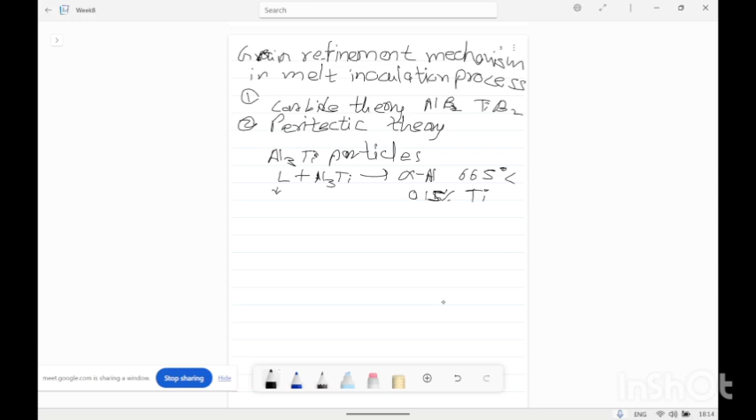Early nucleation of aluminum allows heterogeneous nucleation, leading to the grain refinement of the microstructure. So the next theory, third, is the peritectic hulk theory.

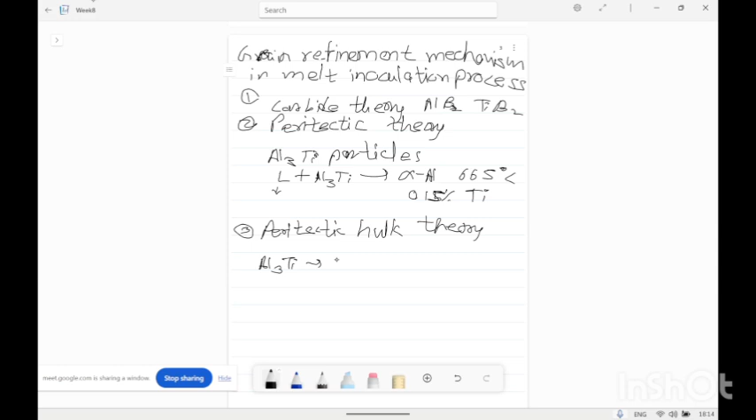In peritectic hulk theory, we know that Al3Ti provides the heterogeneous surface. But the intermetallic particles can also be dissolved with time, as the temperature of the liquid is still high. With prolonged exposure, the intermetallic particles can dissolve in the matrix. So the dissolution of these particles has to be prevented to maintain grain refinement.

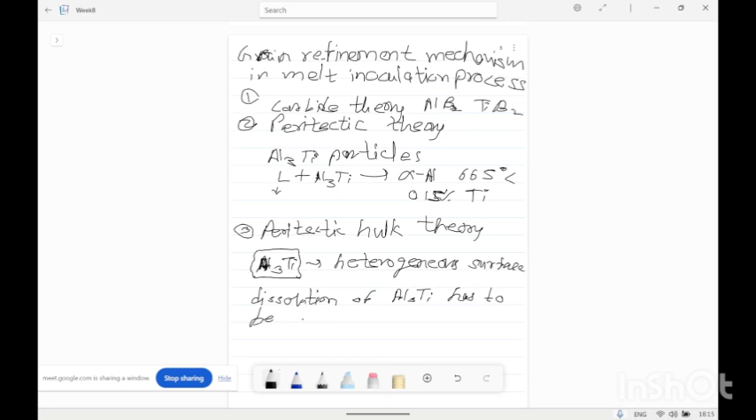So how can it be prevented? TiB2 particles, which form with the aluminium-titanium-boron master alloy addition, surround the Al3Ti particles and form a shell around them to avoid dissolution. As the melting point of TiB2 is very high, these titanium boride particles prevent the dissolution of the Al3Ti particles.

As the Al3Ti particles dissolve as the process proceeds, they leave behind a liquid of peritectic composition inside the boride shell with time.

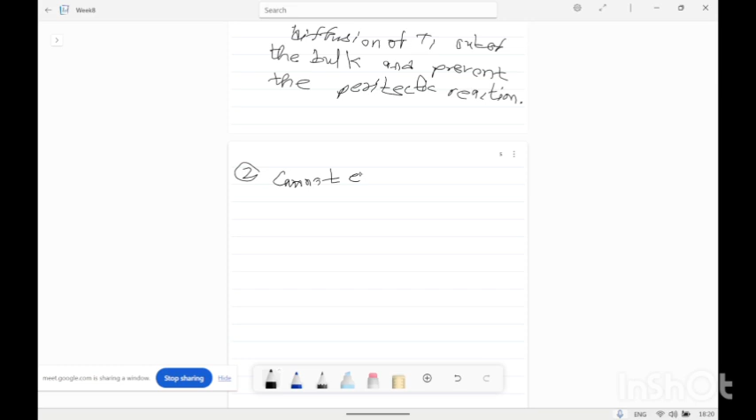The second limitation is that it cannot explain the recovery by the stirring process. Because in stirring, the settled Al3Ti particles will again disperse in the bulk, be suspended uniformly, and provide heterogeneous nucleation sites.

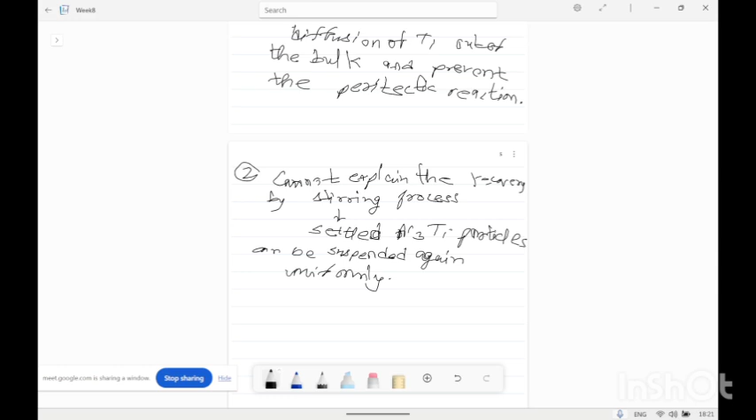The next theory is the hypernucleation theory. In hypernucleation theory, titanium segregates at the boride-melt interface and restricts the mobility of aluminum atoms in the liquid, which leads to the formation of pseudocrystals.

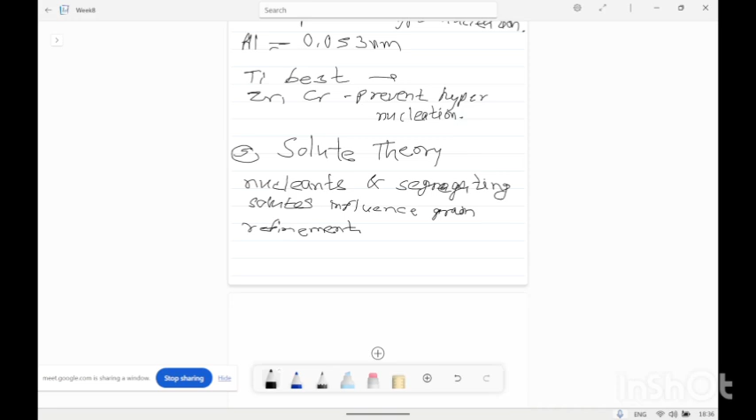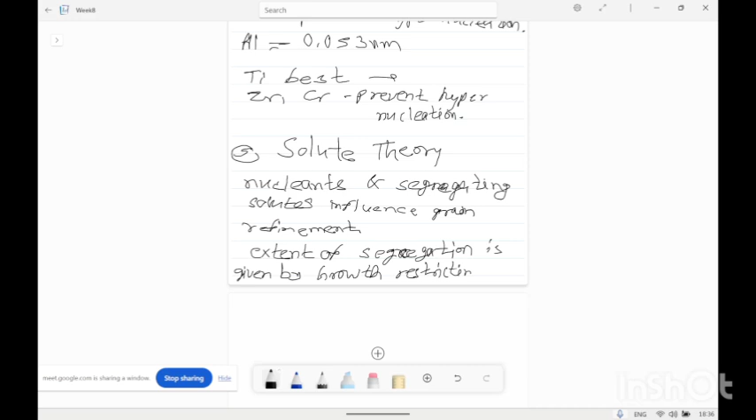So the extent of segregation of nucleants and solute atoms is given as the growth restricting factor. So the GRF, that is growth restricting factor, is given by a formula. If we write the number of grains per unit volume, meaning nucleating grains, by NVG, and number of particles per unit volume, NBP.

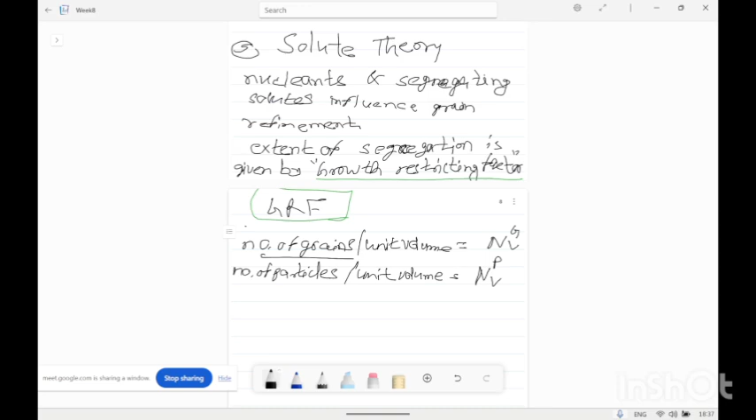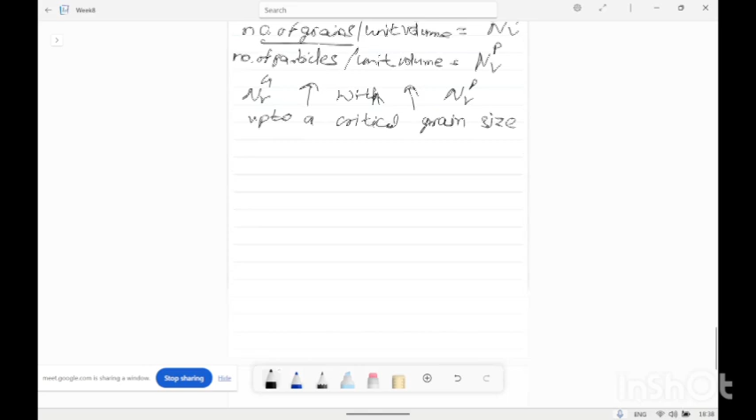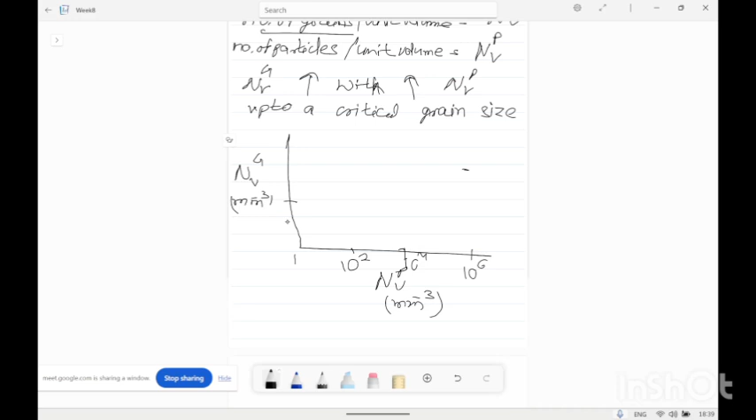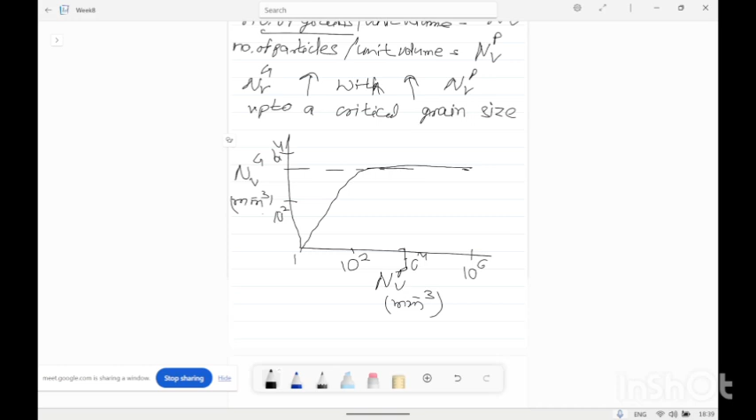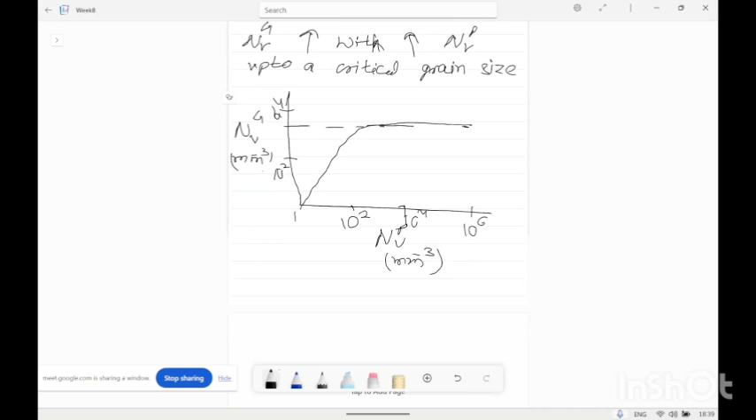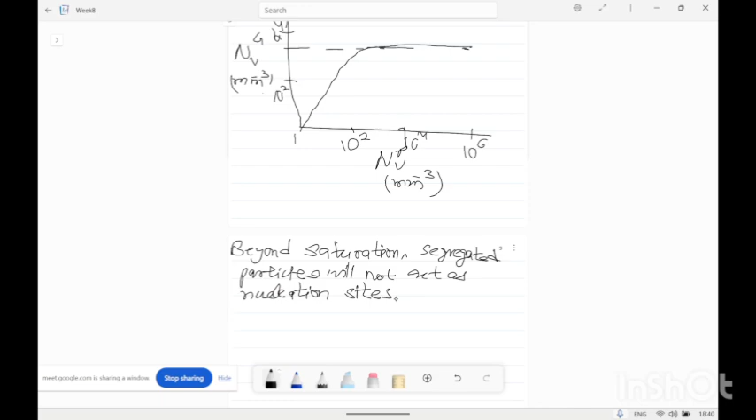So after saturation, the segregating particles do not act as nucleation sites. Means beyond saturation, segregated particles will not act as nucleation sites. And for finer grain size, the growth restricting factor should be high. Means growth restriction should be there.

So if we see the relation between growth rate and growth restricting factor, they relate inversely. Means for high growth restricting factor, the growth rate will be low, and the GRF is given as mC0(k minus 1). So here m is the slope of the liquidus line, C0 is the solute concentration in melt, and k is the equilibrium partitioning constant.

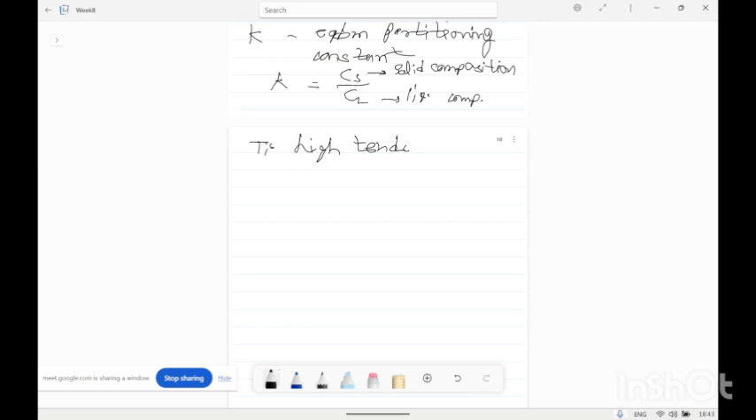That is given as k equals Cs by Cl, where Cs is the concentration of solid, so this is solid composition, and this is liquid composition. So the segregated titanium has a high segregation tendency. Means high growth restricting factor. That's why the grain refinement is higher with titanium addition.

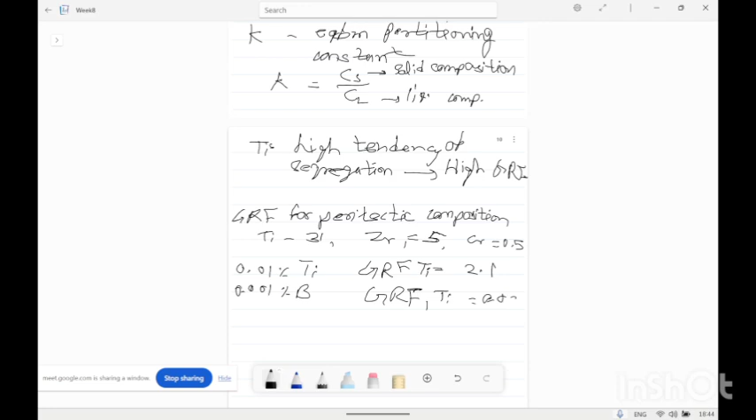So the GRF values for the peritectic composition will be: for titanium it is 31, for zirconium it is 5, and for chromium it is 0.5. So here we can see that zirconium and chromium have less growth restricting factor. Similarly for 0.01% titanium addition, the GRF for titanium will be 2.1, and for 0.001% boron, the GRF of titanium will be 0.02. Means boron can restrict the segregation of titanium atoms.

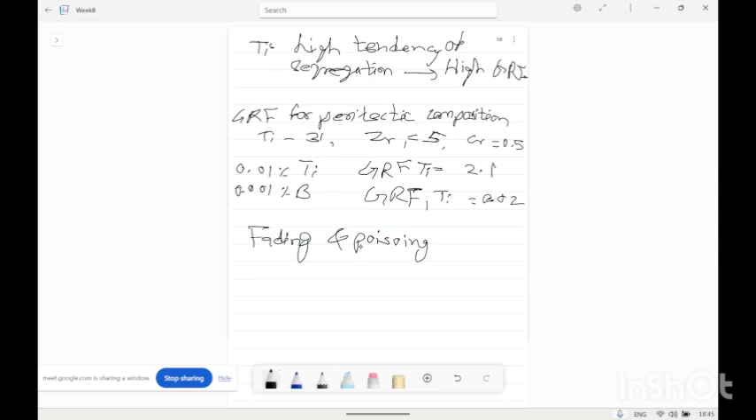Next theory in grain refinement is fading and poisoning. Fading means the decrease in nucleation rate, and the grain refinement efficiency decreases with time and is lost after some time. And poisoning means the stopping of the grain refinement efficiency.

So the solubility of titanium in liquid aluminium is very less; the titanium solubility in aluminium is 0.25% maximum. If the concentration of titanium is very less, 0.01% titanium, the Al3Ti particles are not stable and dissolve with time, leading to fading of the grain refinement efficiency. The dissolution of these particles depends on the holding time. Then the grain refinement efficiency will be lost if the Al3Ti particles dissolve.

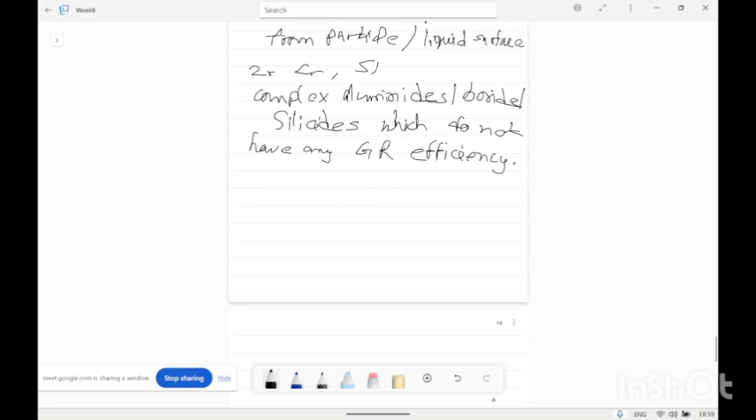So these are the limitations of element addition in the grain refinement process. Next is how grain refinement is achieved in melt inoculation by other means.

Grain refinement by mechanical or electromagnetic means can also be done by stirring or vibration. It can be done by mechanical stirring, electromagnetic stirring, and third is bubble mixing.

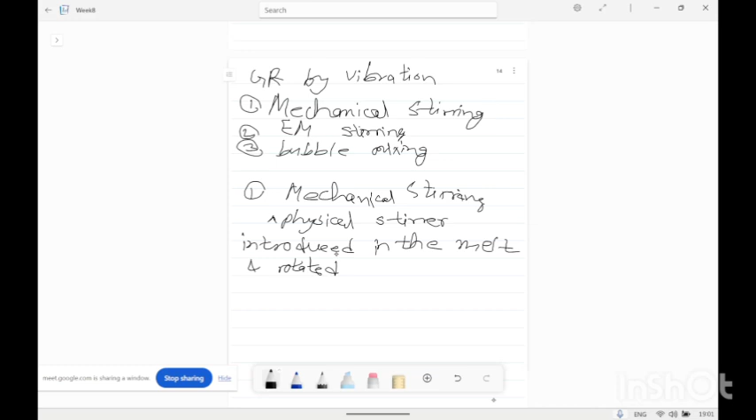So in the mechanical stirring process, a physical stirrer is introduced in the melt and rotated by a motor. The mechanical stirring generates a shear fracture mechanism. In the shear fracture mechanism, the shear force generated by the mechanical stirring breaks the dendrite arms.

Shear force is caused by stirring of the viscous liquid, meaning the melt. So the shear force generated in this process leads to fragmentation and breaking of the dendrite arms. Dendritic arms means, as we see in the solidification process, at the mold surface small grains generate and grow as dendrites into the melt.

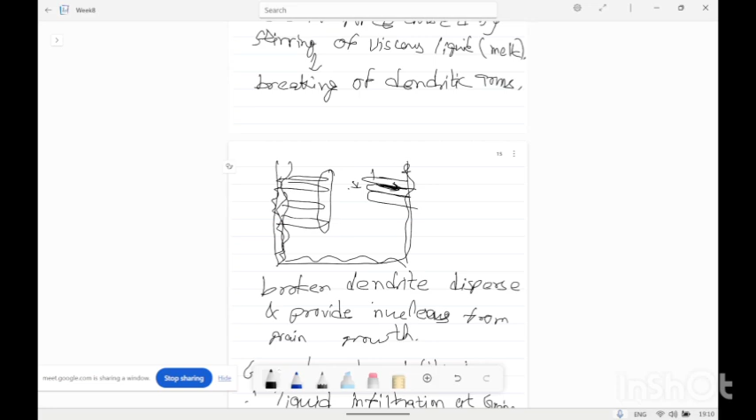So this formation leads to the breaking of dendrite arms. This increase in grain boundary energy above the solid liquid interface leads to detachment of dendrite arms from their mother grain. In this picture we can see two solid grains. The solid liquid interface is this, and this is solid. So if this energy exceeds twice the solid liquid interfacial energy, the dendrite arms will detach from the mother grain.

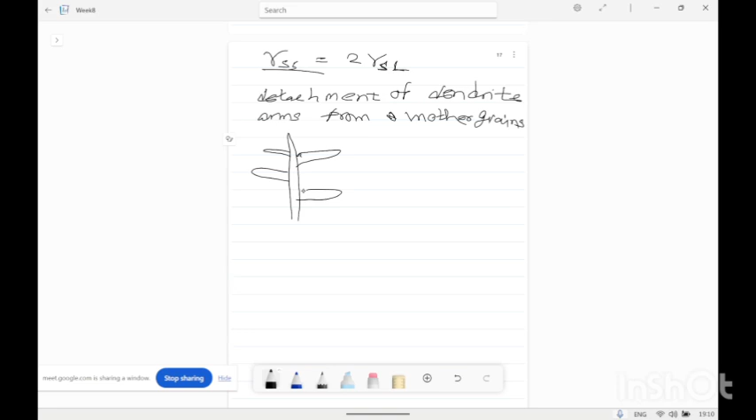The next mechanism is the remelting of the dendrite root. The dendrite forms with multiple arms. First this is the primary arm, next are the secondary arms nucleating from the primary dendrite, secondary dendritic arms.

So at the root of these secondary dendrite arms, due to the induced ripening and stirring effect, the solute segregates near the dendrite root. Due to the stirring process, solute segregates at the dendrite root.

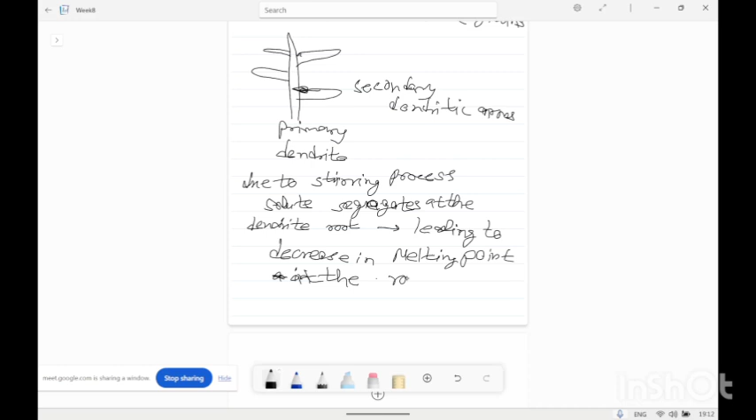So the segregation of solute near the dendrite root leads to a decrease in melting point in that region, at the root. And the curvature existing at the dendrite root also decreases the melting point of that region.

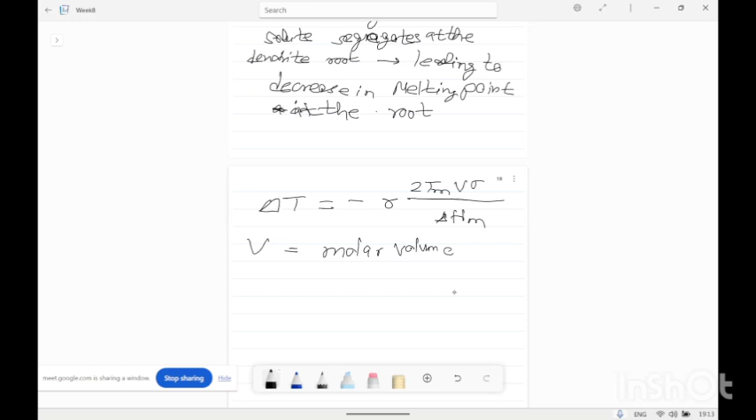So the decrease in temperature near the dendritic root is given as 2 Tm V sigma divided by R delta Hm. Here V is the molar volume, sigma is the solid-solid interfacial energy, delta Hm is the molar heat of fusion, enthalpy of fusion, and R is the radius of curvature at the dendritic root.

So the fluctuation produced by the stirring process leads to temperature and composition changes near the dendritic root, which leads to remelting of that dendrite arm. In this position, due to stirring, the composition and melting point in this localized region change, leading to the melting of this arm. So the broken secondary arm will be free, and in the stirring process will act as a site for heterogeneous nucleation because of the remelting of the secondary dendrite arm at the root.

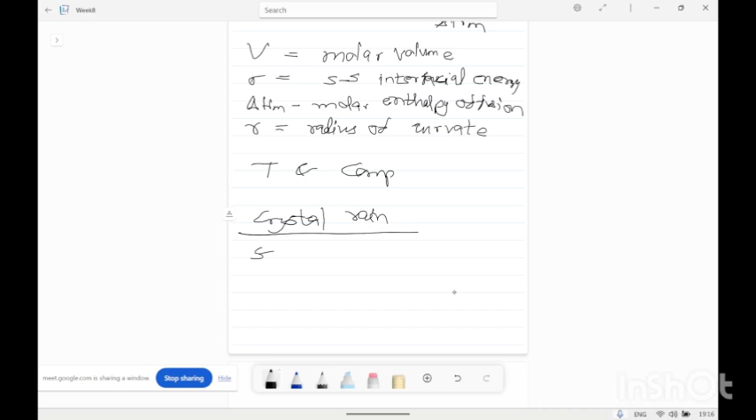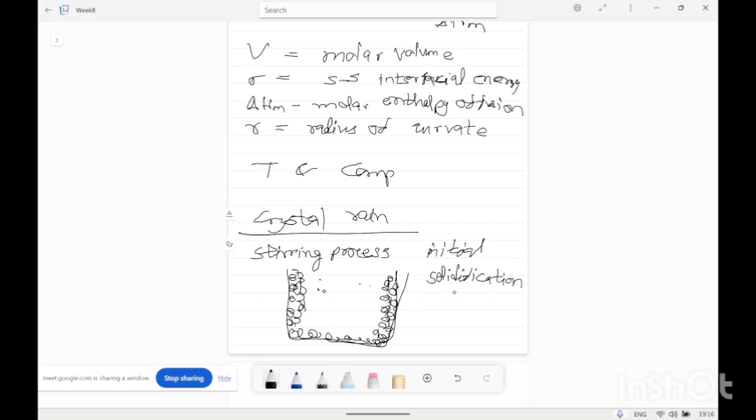So the next process is the crystal rain. In the initial process of solidification, small nuclei form near the mold walls, and near the walls the solid phase concentration is higher than the liquid phase. So due to the stirring process, the solid phase detaches from the mold walls and starts to fall in the liquid.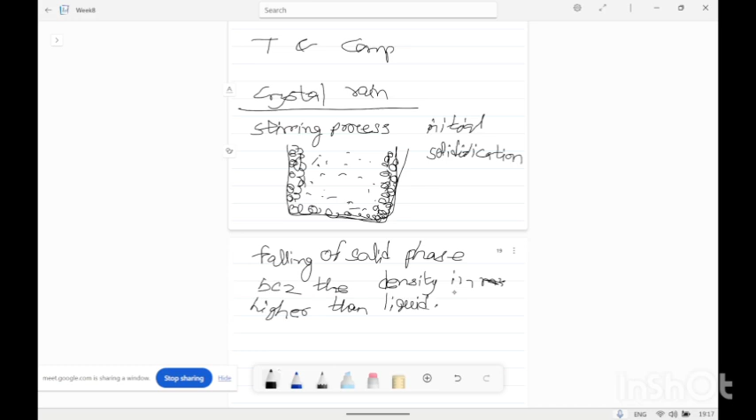The falling of the solid phase is also due to density difference, because the density of the solid phase is higher than the liquid, so it starts to fall in the liquid. The number of solid phases is so high that it looks like a crystal rain in the liquid melt. So the crystal rain leads to a very high increase in grain refinement efficiency.

So the falling solid phases or nuclei of grains can remelt because of the heat flux of the liquid, or can grow.

Next mechanism is ultrasonic cavitation. In the solidification process, some bubbles are present in the liquid melt because of gases entrapped in the melt. The clustering, growth and sudden collapse of these big bubbles generates cavitation in the liquid and provides a much higher pressure on the melt layers for a short time.

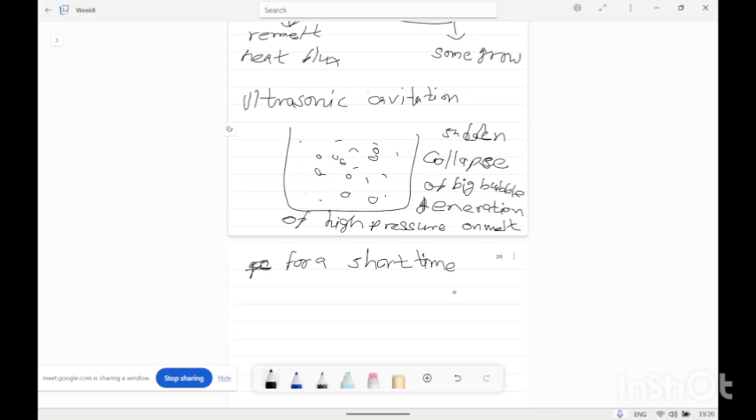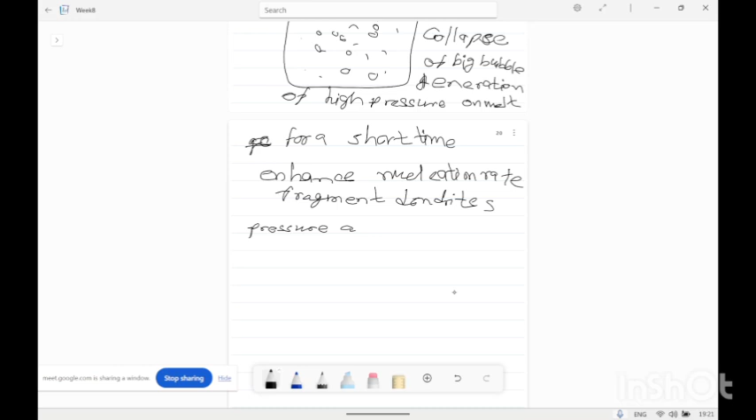So the generated pressure enhances the nucleation rate, and it also fragments the dendrites. The high pressure decreases the activation energy for nucleation, and because the activation energy decreases, it leads to more nucleation of particles.

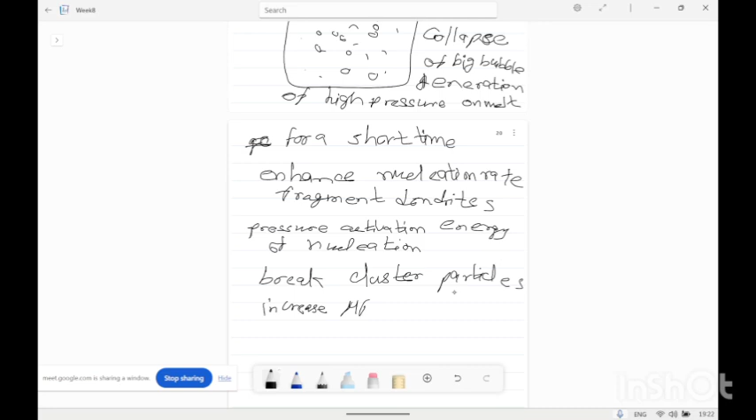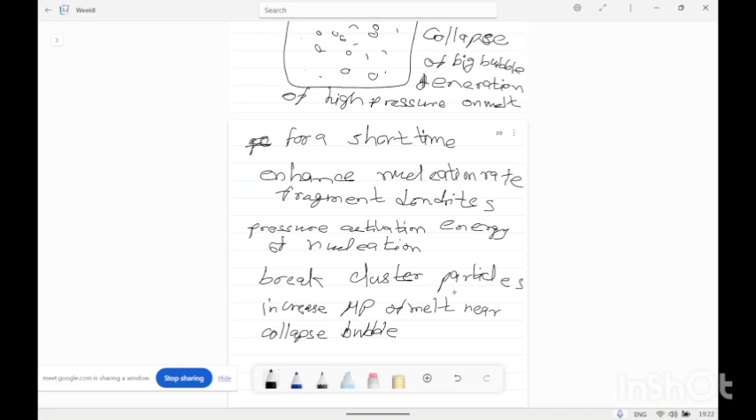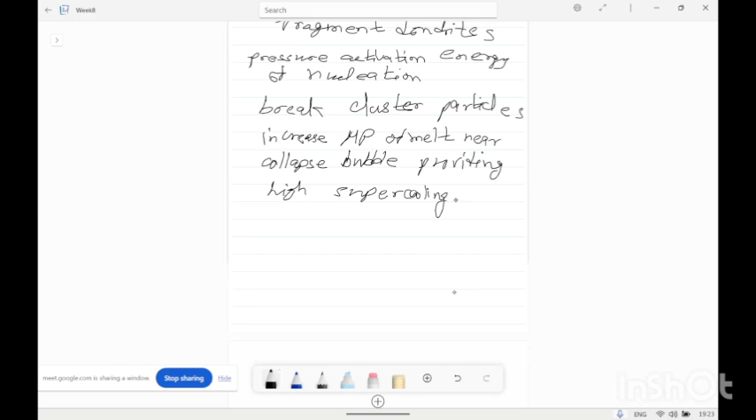The high pressure generated also breaks cluster particles, which provides more heterogeneous sites, and increases the melting point of the melt near the collapsed bubble, providing effective high supercooling. So the high supercooling also leads to a high nucleation rate.

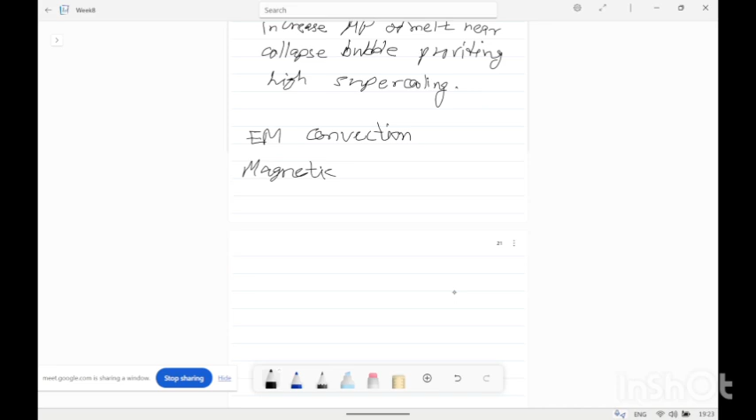Next process is electromagnetic convection. Due to the electromagnetic stirring effect, the magnetic field generates a Lorentz force in the liquid melt.

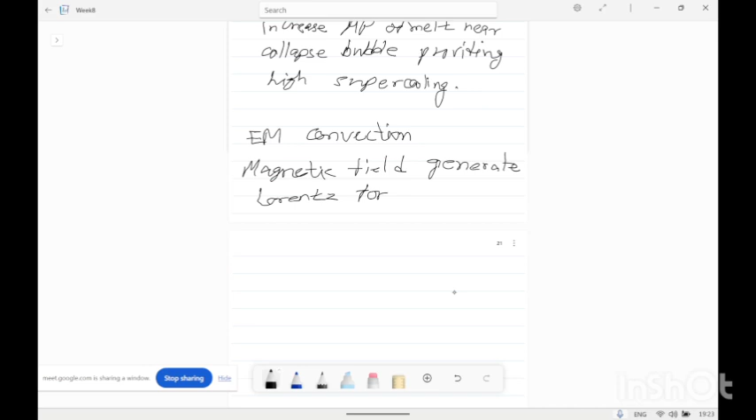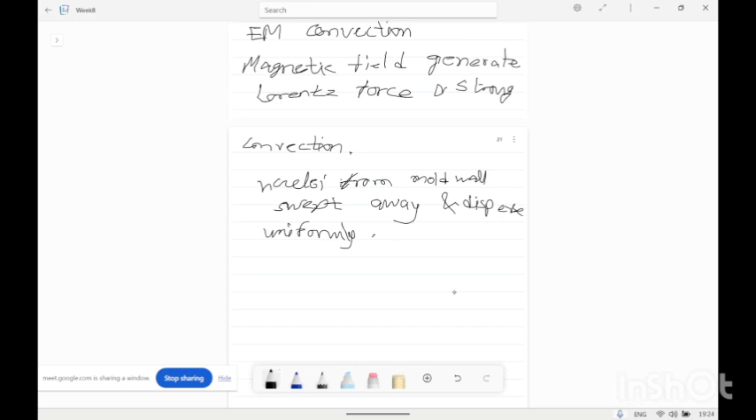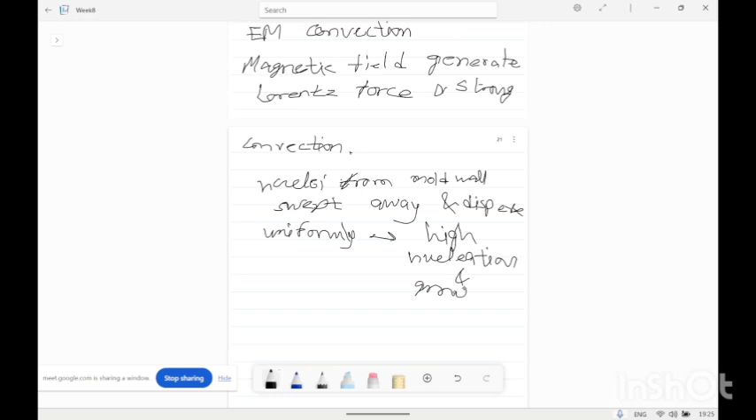And strong convection. So the generation of this Lorentz force and strong convection leads to much more fragmentation of dendrites, and the nuclei will also be swept away from the mold wall. Swept away and dispersed uniformly in the melt, providing high nucleation and growth, leading to finer grain size.

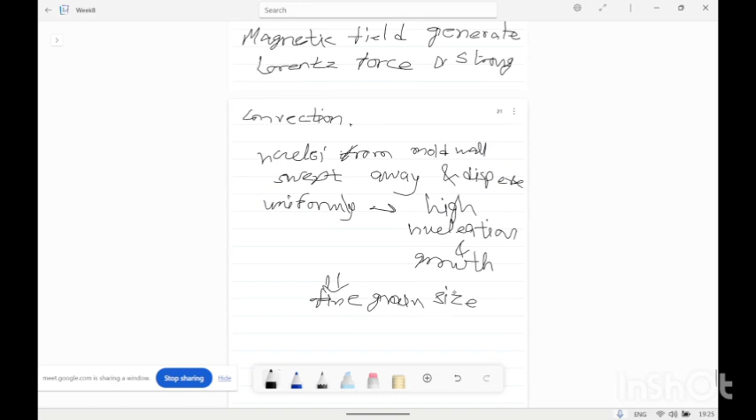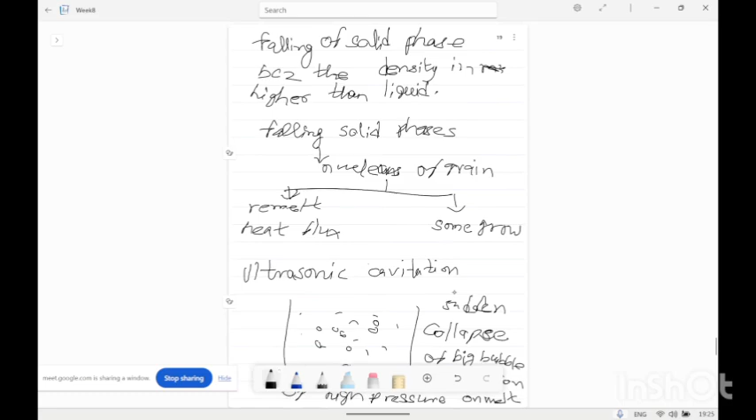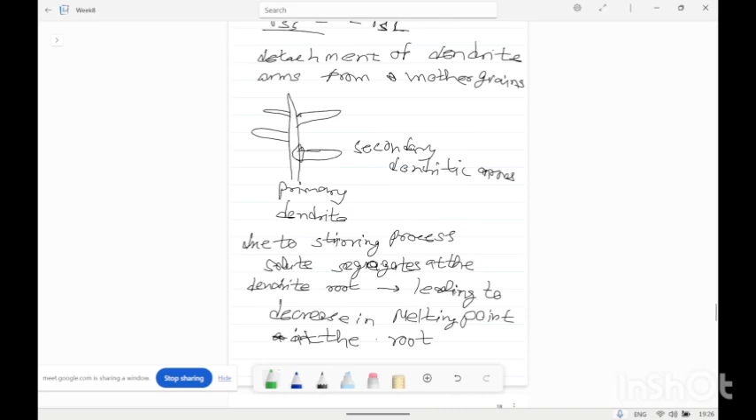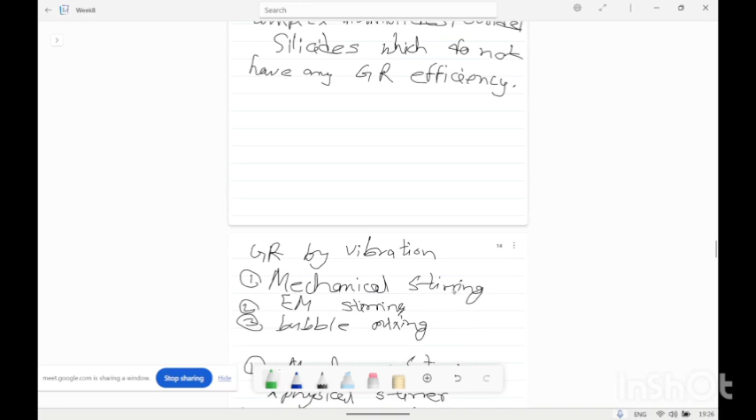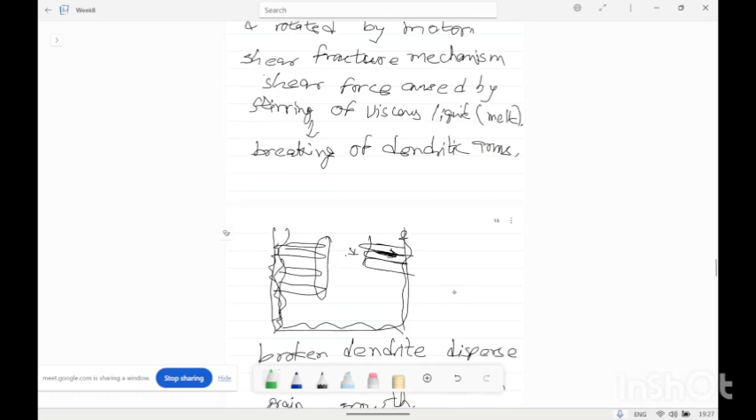So the next method for grain refinement is severe plastic deformation. So what is severe plastic deformation? All other processes which we studied earlier are liquid phase processes, but severe plastic deformation is a solid state grain refinement mechanism, in which a part is subjected to severe plastic deformation to a much higher level that leads to dynamic recrystallization.

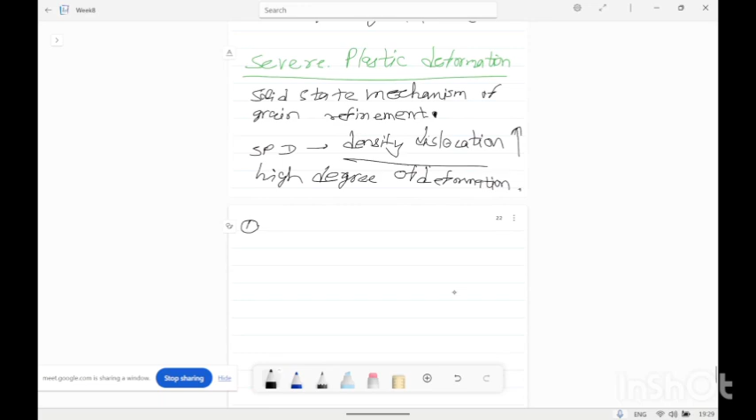So there are different processes to provide severe plastic deformation. First is high pressure torsion, and equal channel angular pressing, ECAP and HPT. In both of these processes, high pressure torsion and equal channel angular pressing, the severe plastic deformation is provided by shearing force with no change in shape or sample dimension, meaning the sample dimensions are maintained.

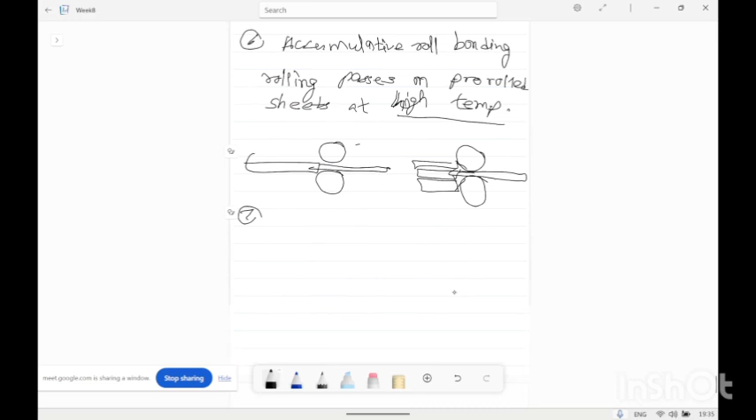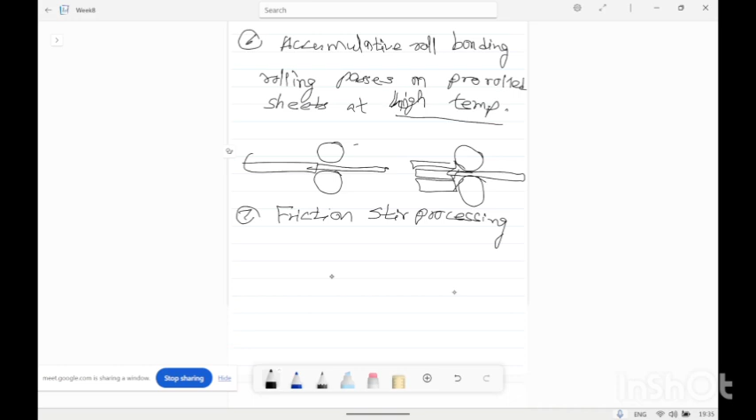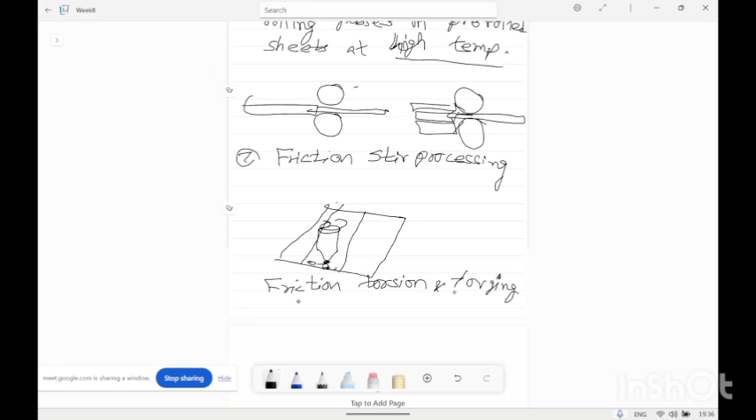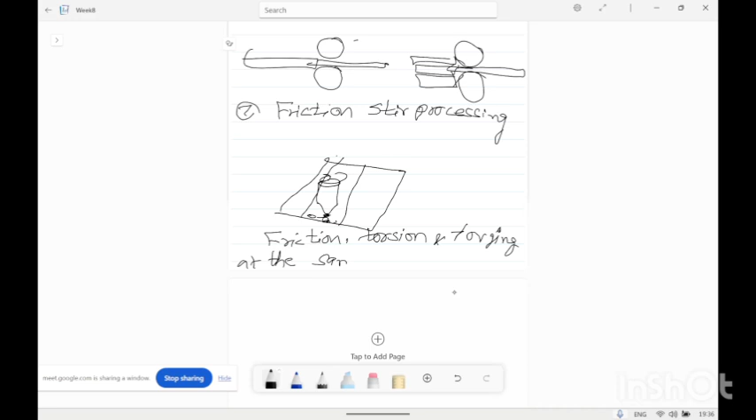The next process is friction stir processing, in which a rotating tool is passed through a part. The friction, torsion and forging at the same time lead first to very high localized plastic deformation, and then grain refinement. So friction stir processed material will have different types of refined grain regions.

In this region the grains are very fine. Near this there will be the thermomechanically affected region. Then farther from that will be the heat affected region, and this will be base material. In the base material the grain size will be high, and as we move from the base to the heat affected zone, thermomechanically affected zone, and friction stir processed zone, there is a significant decrease in grain size.

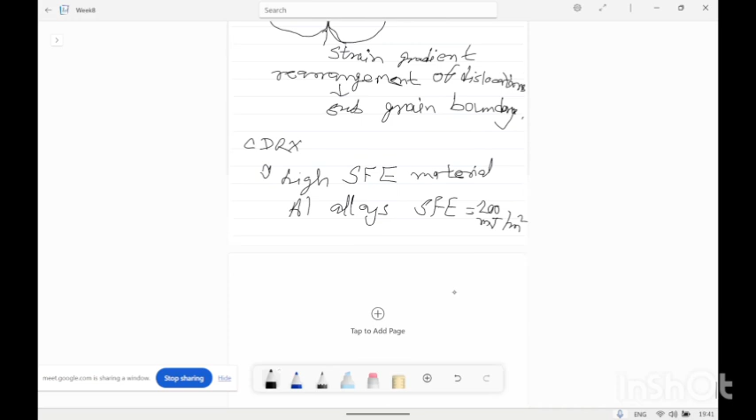While in the continuous dynamic recrystallization that happens in high stacking fault energy materials like aluminium alloys, which have a stacking fault energy of 200 millijoules per meter square, that leads to the rearrangement of dislocations near the subgrain boundaries, leading to the formation of low angle and high angle boundaries.

So the subgrain boundaries formed in continuous dynamic recrystallization have low angle grain boundaries. In continuous dynamic recrystallization, the low angle grain boundaries transform into high angle grain boundaries by rearrangement and rotation of dislocations. Rearrangement of dislocations and rotation of grain boundaries.

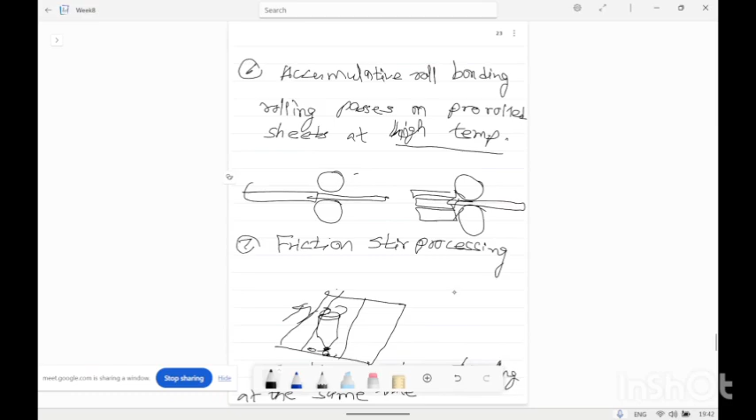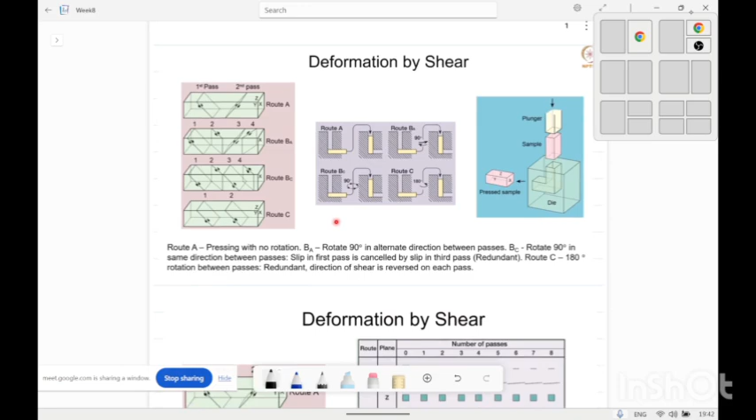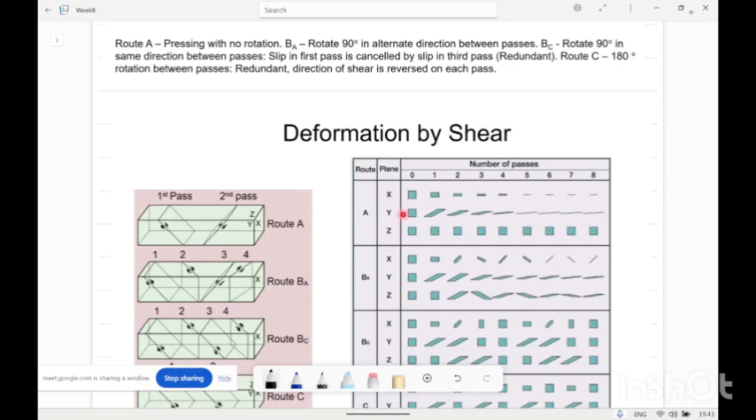So in these pictures, the severe plastic deformation in the different processes, deformation by shear, is shown as the deformation in different passes; the rotation leads to different orientations of deformed regions. Like in this process, route A leads to pressing with no rotation.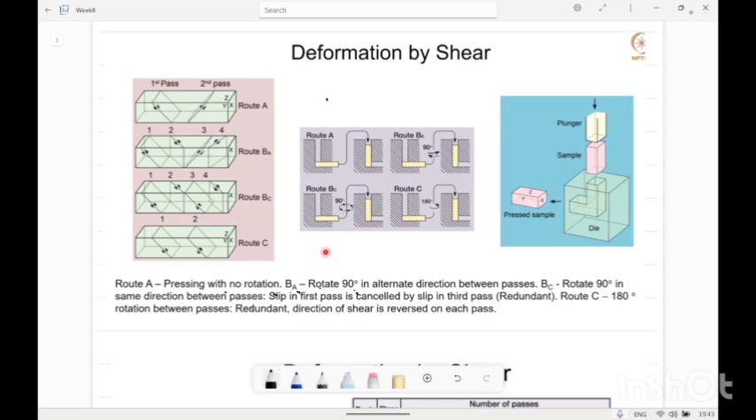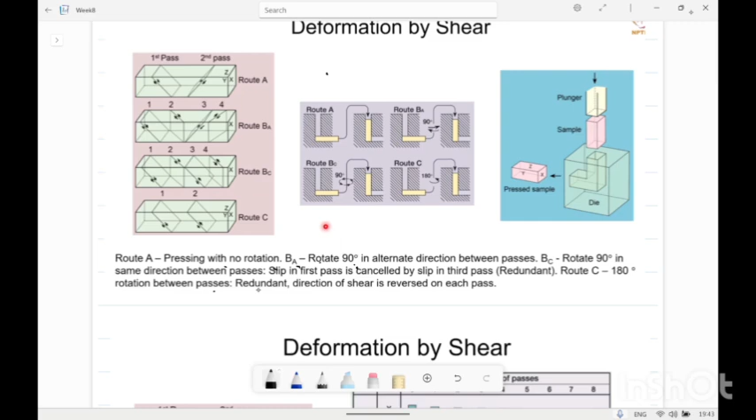In the route BA process, the part was rotated 90 degrees in alternate directions between passes. In route BC, a rotation of 90 degrees in the same direction between passes is done. That leads to slip in the first pass being cancelled by slip in the third pass. That I will explain in a while. In route C, a 180 degree rotation is done between passes, that is redundant, meaning the direction of shear is reversed on each pass.

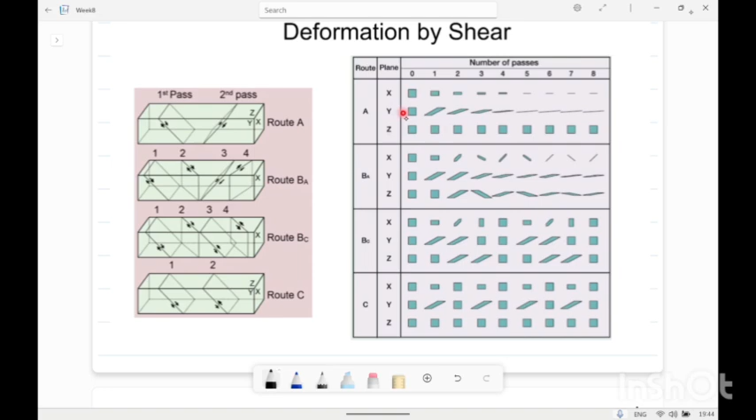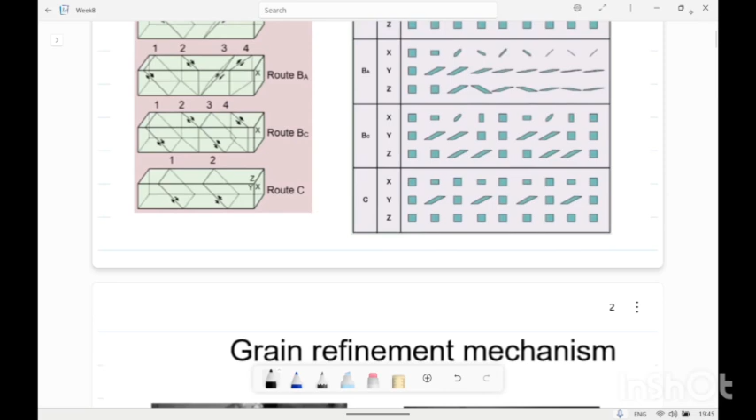In the A route, no rotation will be done, meaning the same part will be fed into the next pass with the same direction. In route BA, the 90 degree rotation with alternate direction leads to different orientations of slip planes and deformed regions. Similarly for BC, the deformation orientation is different.

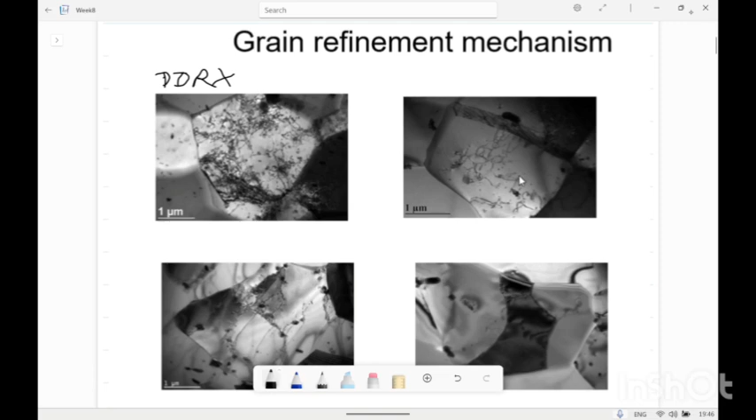So in these pictures, grain refinement mechanisms are shown. In the first picture, as we can see, the dislocation density is very high in one grain, while the neighboring grains do not have any appearing dislocations. So a strain gradient exists in this material, so this is a case of discontinuous dynamic recrystallization. While the second process can be continuous dynamic recrystallization, because there is no accumulation of dislocations in one grain.

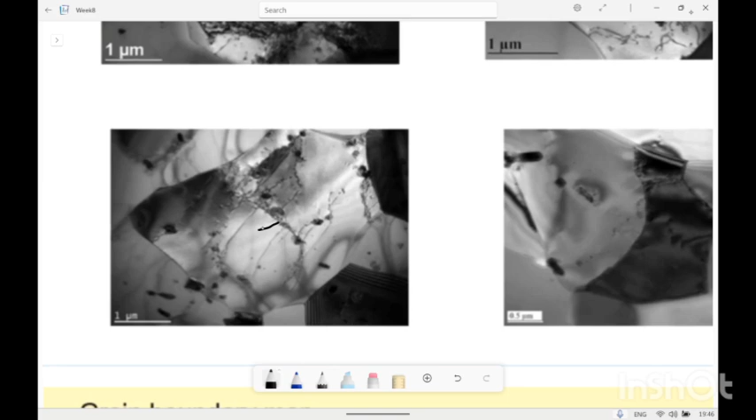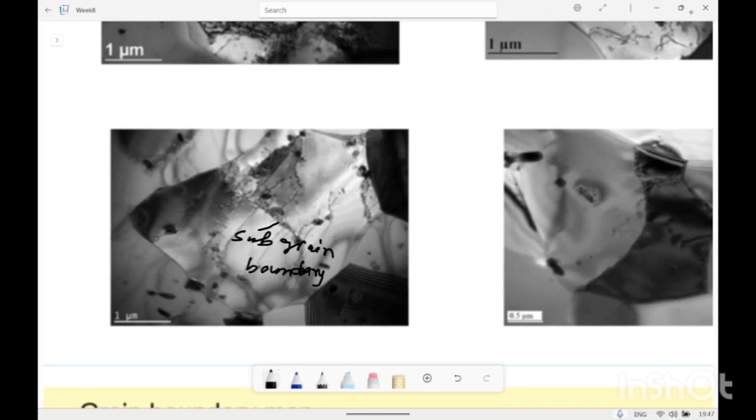While for the next picture, if we zoom in, we can see the subgrain boundary formed in one grain. So this is a subgrain boundary formed by the accumulation of dislocations because of the strain gradient.

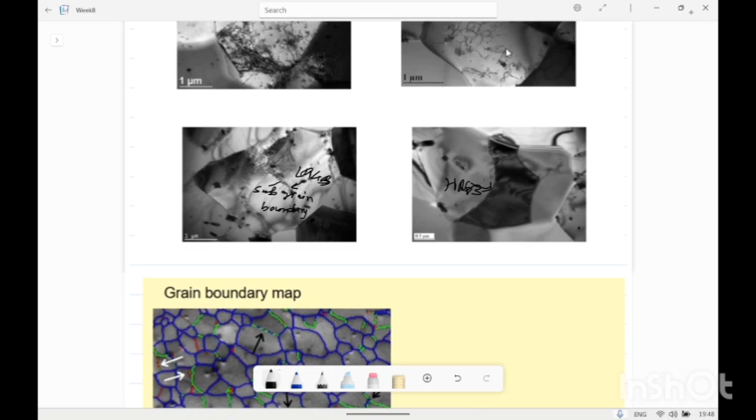And with time, if the recrystallization process proceeds, complete dividing of the grains happens because of the formation of high angle grain boundaries. This is the low angle grain boundary that will form, and this is the high angle grain boundary. That's why we can see the contrast between these two grains. So how do low angle and high angle grain boundaries form in a microstructure?

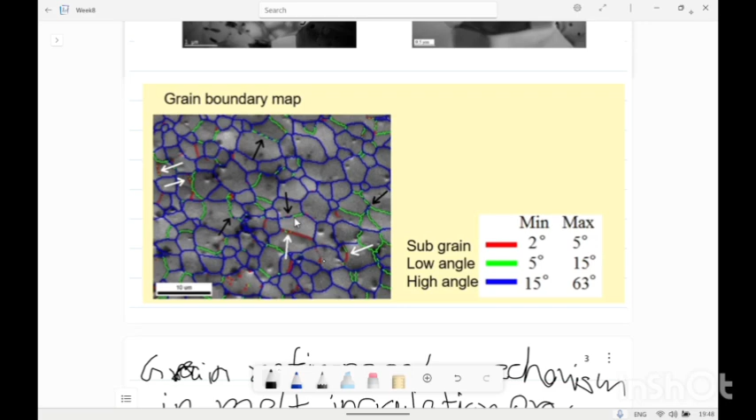So here we can see the EBSD micrograph, which is the best tool for finding high angle grain boundaries, low angle grain boundaries and subgrain boundaries. In this, the grain boundary map is imposed on the image quality map, in which the red lines denote the subgrain boundaries, which have a minimum misorientation angle of 2 degrees and maximum up to 5 degrees. The different red boundaries can be seen in this picture.

So at some points it is converting into the green line or blue line. The blue line is the high angle grain boundaries, whereas the green line is low angle grain boundaries. With the rearrangement of dislocations, the subgrain boundaries transform into low angle grain boundaries, and further rearrangement of dislocations and rotation of grain boundaries lead from low angle grain boundaries to high angle grain boundaries. So the transformation can be seen.

So in this grain, initially it was a single grain, but due to the formation of subgrain boundaries, it is divided into two grains, while the subgrain boundaries are also slowly transforming into low angle grain boundaries. That is shown by this transformation of red to green.